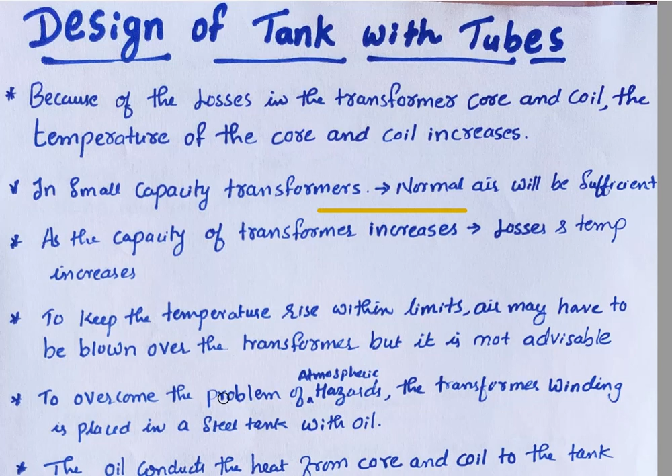For any transformer, the temperature depends on the losses - more losses mean more temperature. For small capacity transformers, normal air cooling is sufficient. As transformer capacity increases, losses and temperature increase, so air may have to be blown over the transformer. But this is not advisable because the air contains moisture and dust particles which affect the transformer winding.

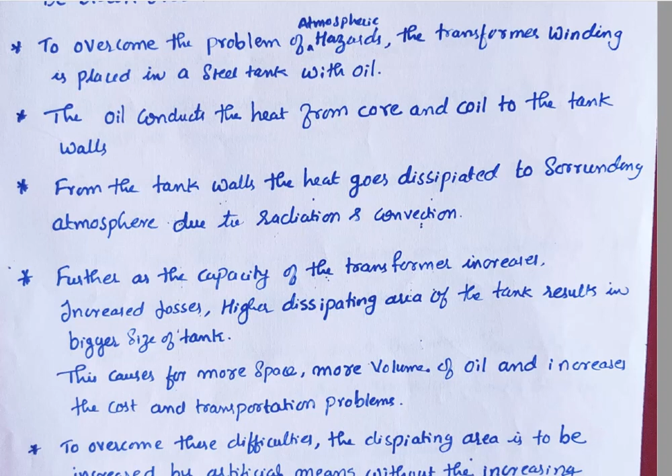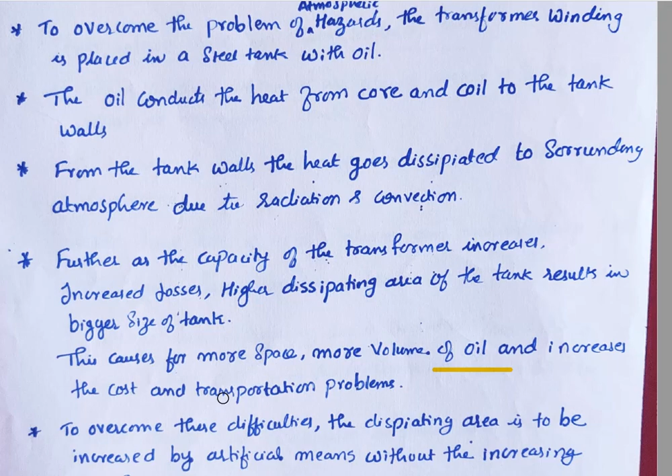As the capacity of the transformer increases, a high dissipating area of the tank is required. This means a bigger tank size is needed, which causes more space and volume, increasing cost and transportation problems. To overcome this difficulty without increasing the tank size, we can provide sufficient cooling through artificial means.

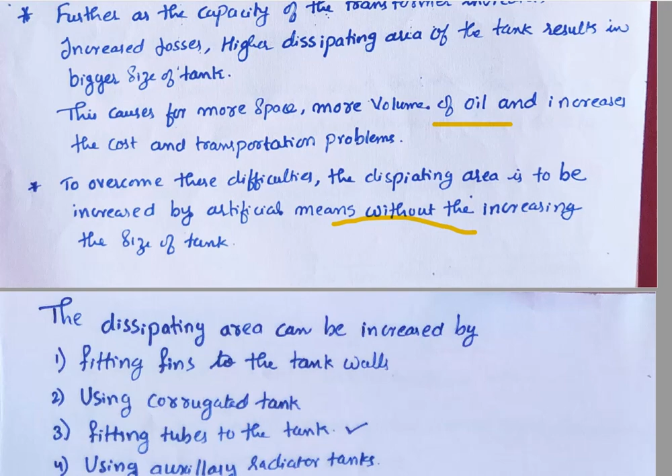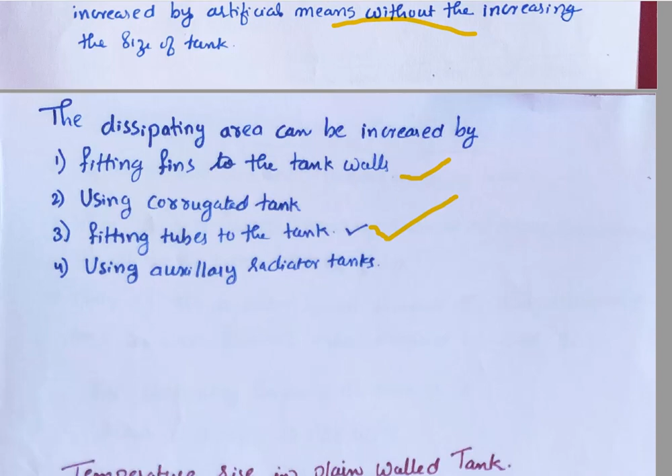The dissipating area can be increased by fitting fins to the walls. Other methods include using corrugated tanks, fitting tubes to the tank, and using auxiliary radiator tanks. We will basically use fitting tubes to the tank - this is the most economical and efficient method, which we have seen already.

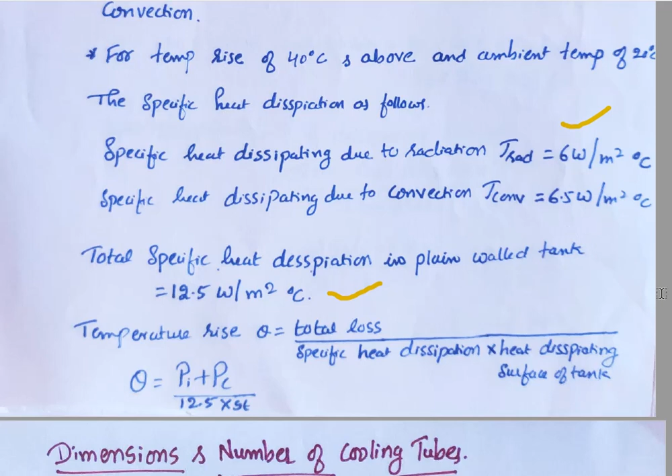Now, temperature rise in the plain tank: the specific heat dissipation in the plain wall tank is given as 12.5 watts per meter square, which includes radiation and convection. Radiation is 6 watts per meter square, and convection is 6.5 watts per meter square centigrade.

For dimensions of number of cooling tubes, we have derived the equation for the dissipating surface of the tank St, which will dissipate 12.5 St, where St is the surface area of the tank that I need to find.

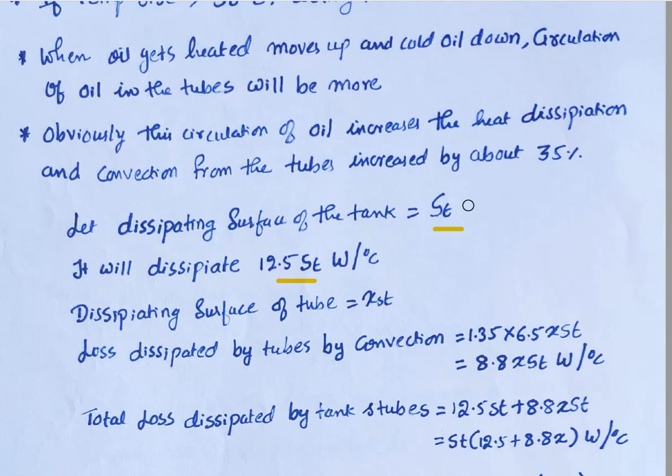The dissipating surface of the tube is x into St. The loss dissipated by tubes by convection is 1.35 times that - usually we take 35% more. So the total loss dissipated by the tank and tubes together gives the surface area of the tank as 12.5 plus 8.8x, as we saw yesterday.

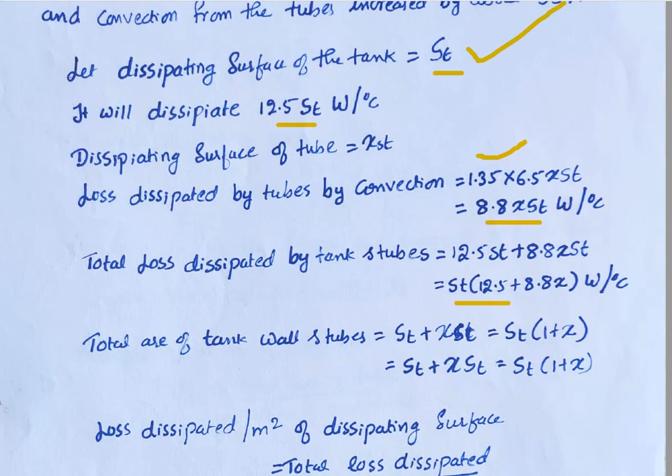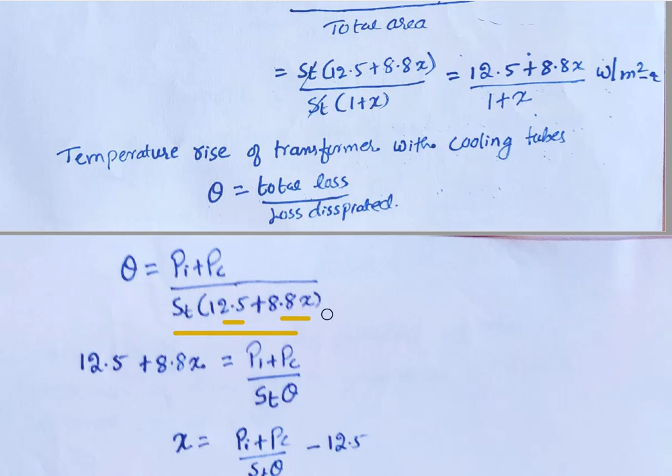Finally, theta, the temperature, equals the losses Pi plus Pc - these are iron losses and copper losses. The loss dissipated is given by the surface area of the tank into 12.5 plus 8.8x. Here 12.5 is due to convection and radiation, and 8.8x is due to the 35% more than the convection for tubes.

So finally you get the x value, and the total number of tubes required is the total area of the tubes divided by the area of each tube. The formula we derived is: number of tubes equals 1 by 8.8 of [(iron losses plus copper losses) by (theta times St)] minus 12.5, where theta is temperature and St is surface area of the tank.

Pi dt into lt, where dt is the diameter of the tube and lt is the length of the tube. This finally gives number of tubes equals 1 by 8.8 pi dt lt times [(Pi plus Pc) by theta minus 12.5 St].

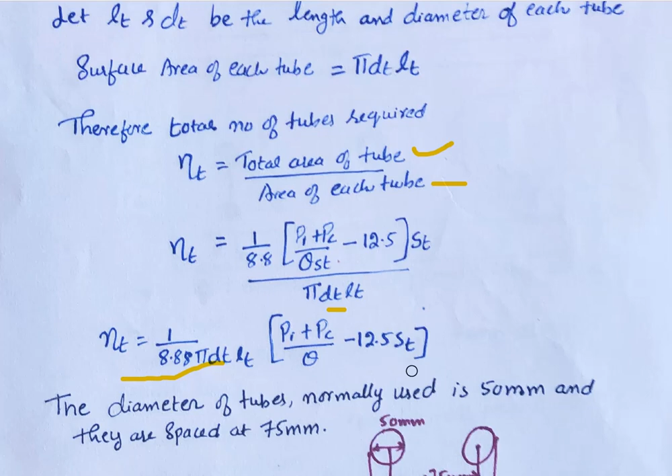Now usually the diameter of the tube normally used is 50 millimeters, and they are spaced at 75 millimeters center to center distance, with the total being 125 mm. Usually we consider only the center to center distance.

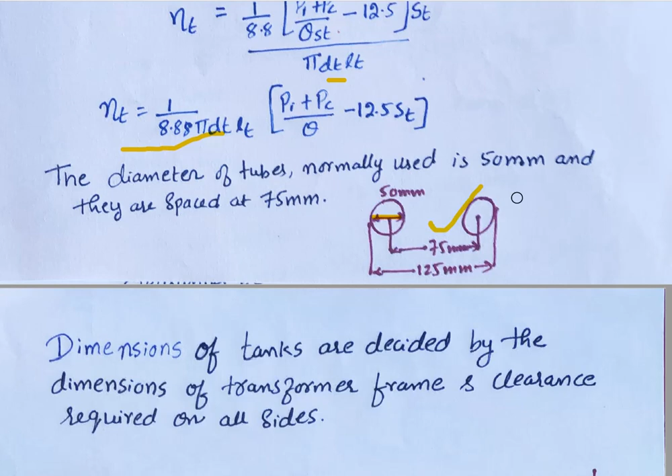The dimensions of the tank are decided by the dimensions of the transformer frame and clearance required on all sides. It also depends on kVA rating, voltage rating, power factor, and the losses. This is a three-phase core type transformer - this is the clearance between the winding and the frame, called C4, and this is the clearance between the ground and the winding of the transformer, shown here.

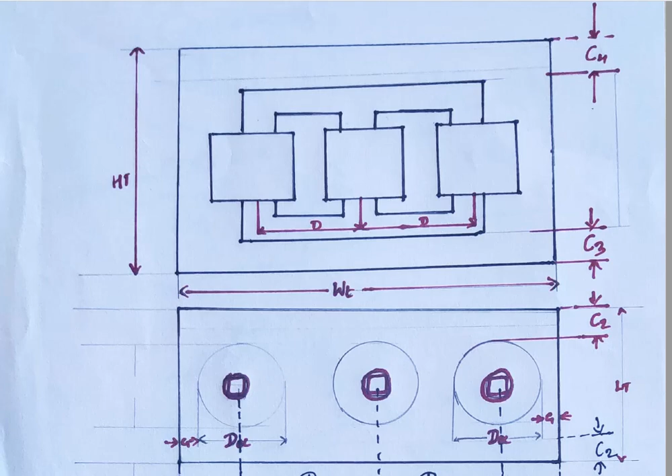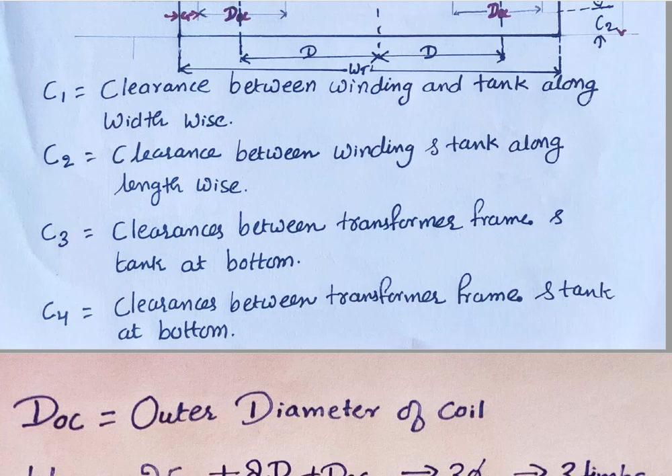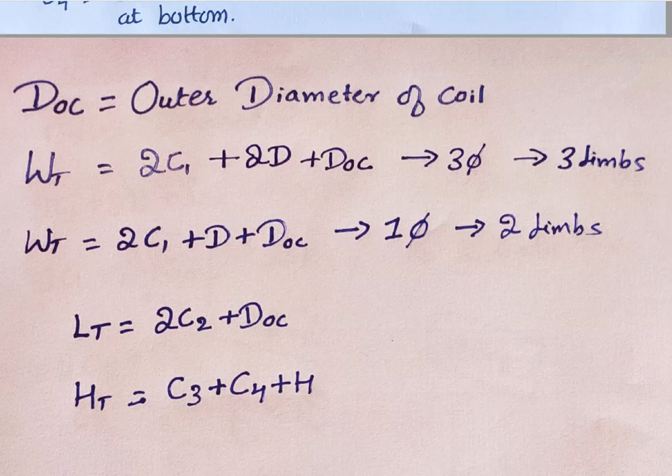This is the diameter, the distance between one limb and another of the transformer, and this is the diameter of the coil, as given and as we saw yesterday. Doc is the outer diameter of the coil. So WT equals 2C1 plus 2D plus Doc.

How you get WT: it is D plus D, that is 2D, and half of Doc plus half of Doc makes one Doc, plus C1 plus C1 which is 2C1. You get this for three phase, and for three phase there are 3 limbs while single phase has 2 limbs.

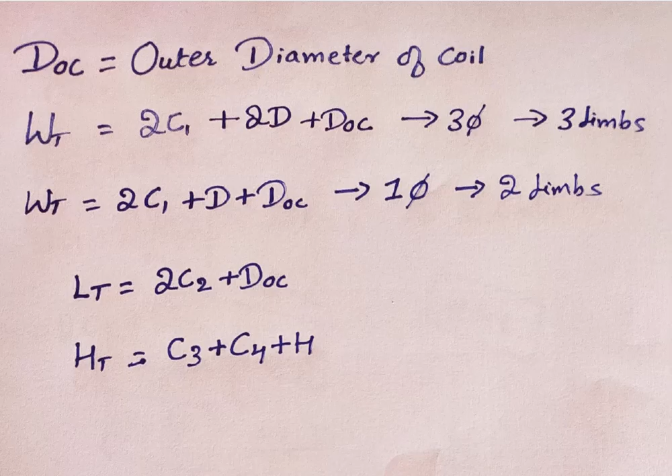For the length of the tubes - the length of the tank and height of the tank - these have been given by these formulas, so while solving the problems you can use this. Now let us solve some problems on this.

The first question: a tank of 1250 kVA natural oil cooled transformer has dimensions length, width, height of 0.65 meter into 1.55 meter into 1.85 meter respectively.

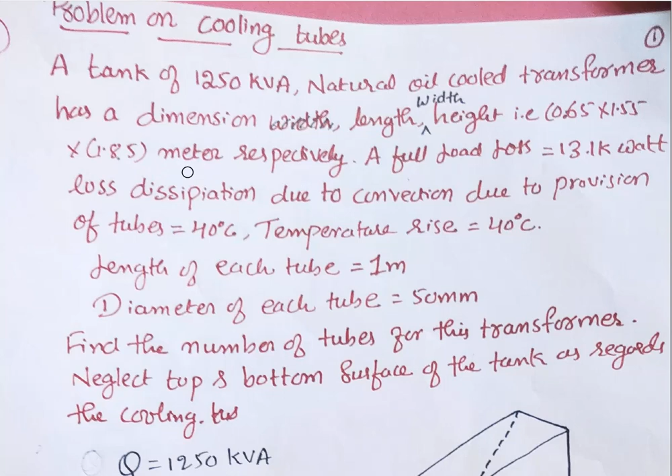Length, width and height have been given. Full load loss of 13.1 kilowatt has been given. Losses include Pi plus Pc, iron losses plus copper losses, and loss dissipation due to convection due to the provision of tubes. Temperature rise is 40 degrees Celsius, length of the tube is 1 meter, and diameter of each tube is 50 mm. If diameter of each tube is not given in the question, take 50 mm only.

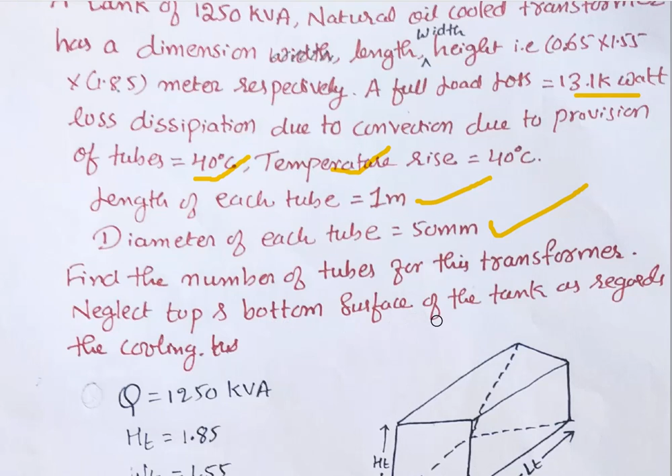So what we need to do is find the number of tubes for this transformer, neglecting the top and bottom surface of the tank as regards the cooling.

Let us say this is my transformer tank. So here, this portion, and the back of this, one more portion will be the same, and similarly this is one portion. This portion from here to here, yes, this portion includes this also. So opposite to this one, one more portion will be there.

So in the question, this is WT, width of the tank, and length of the tank and height of the tank have been given, and the power of the transformer is 1250 kVA. Let us estimate the surface area of the tank.

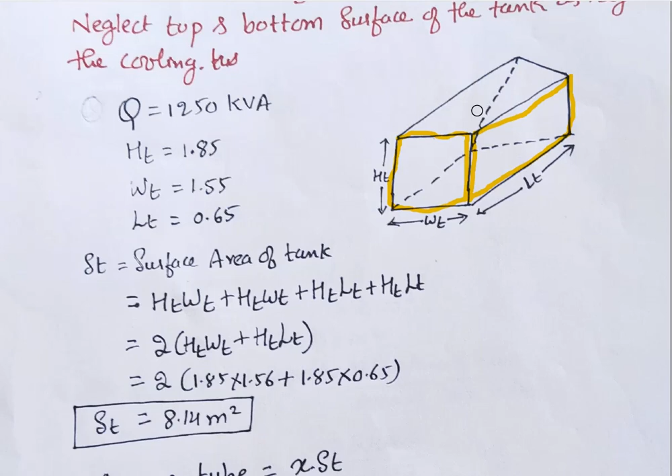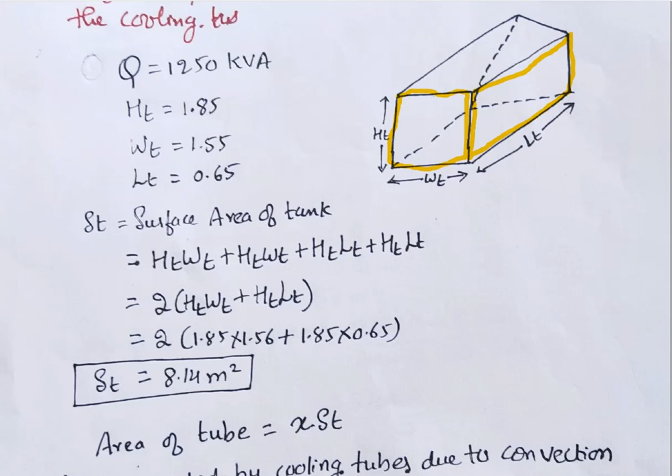What is the total surface area of the tank? So total surface area of the tank is this portion and the backside of that, and this portion and backside of that. Usually the top portion and bottom portion are neglected, so only the tubes will be arranged on the sides. So now for this portion my area will be...

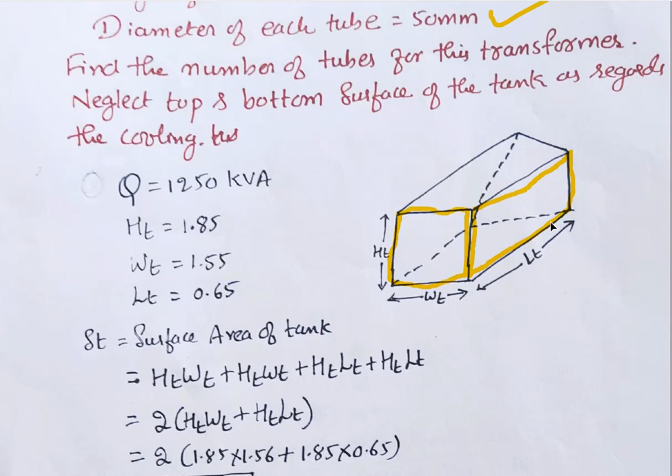This is like a rectangle. So HT into WT, and one more will be the backside, plus HT WT. This portion will again be rectangular, HT height of the tank into LT, and the same thing on the opposite side will also be there. So 2 times HT WT plus 2 times HT LT, given here as 2(HTWT) plus 2(HTLT). So 2 into 1.85 into 1.56, this is given in the question.

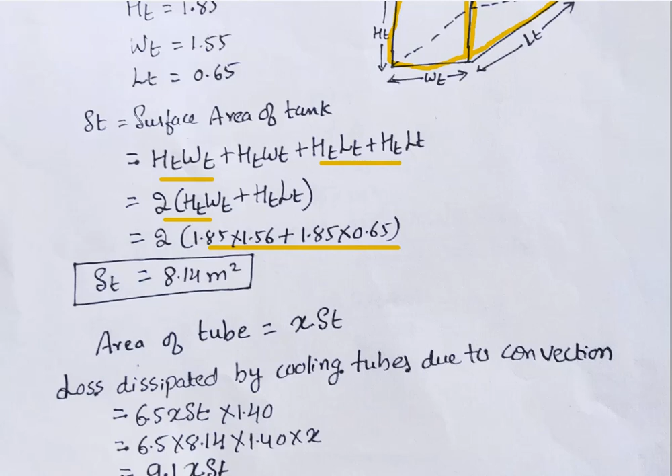So these values are these values, as per the question. Then from this we find out the surface area of the tank. It is 8.14 meter square.

Next, we need to find the area of the tube. Area of the tube is x into St, where we know St but need to find x. So how to find x?

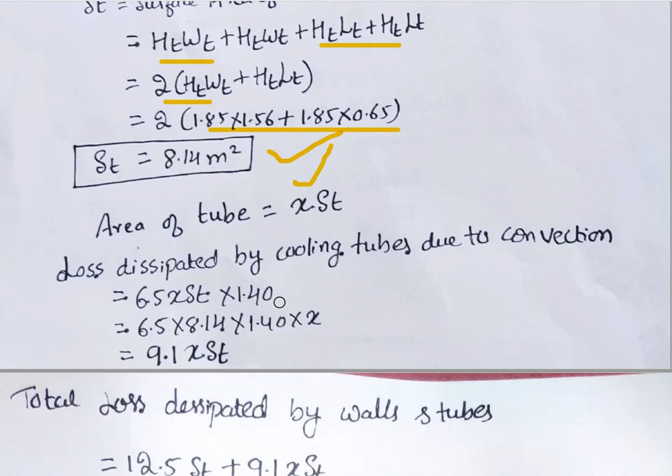Loss dissipated by the cooling tubes due to convection is 6.5 into x into St into 1.40. They have given 40% instead of 35. In the derivation we have seen 35%, but here in the question they have given 40%. So 6.5 into my surface area of the tank, 8.14, into 1.4 into x.

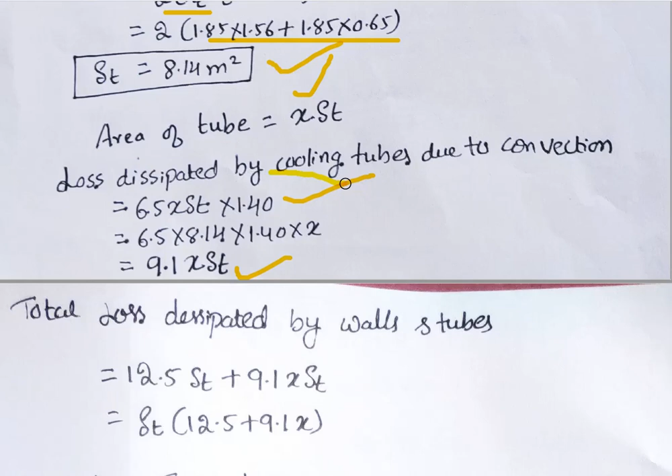So it becomes 9.1 x into St. Keep this St in this form only. Now this is the loss dissipated by the cooling tubes due to convection. Now this is the loss dissipated by the walls and tubes.

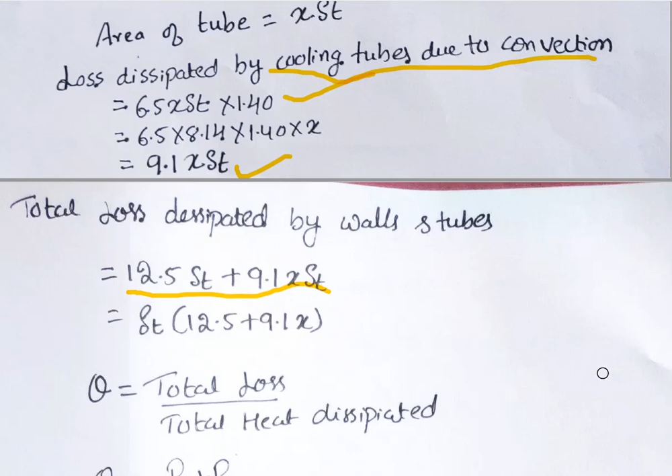So it is 12.5 St plus 9.1 x St. By the walls and combination of tubes, this 12.5 is due to radiation and convection, and here 9.1 is due to convection into St, the surface area of the tank. So if you take St common, we get St into (12.5 plus 9.1x).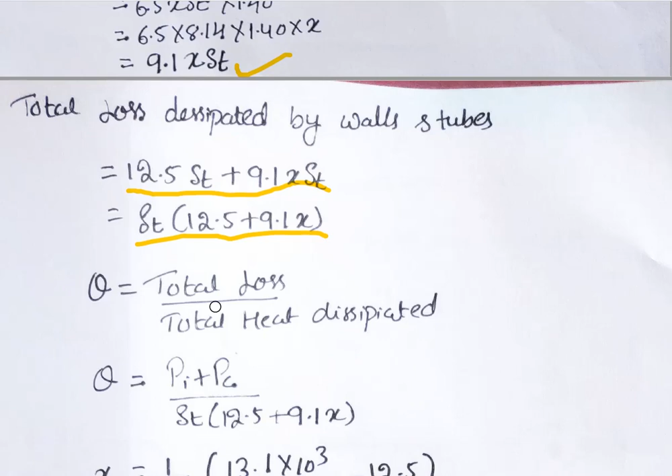So temperature equals total loss by total heat dissipated. So theta equals Pi plus Pc, that is iron losses plus copper losses, giving the total losses, divided by St, the total heat dissipated.

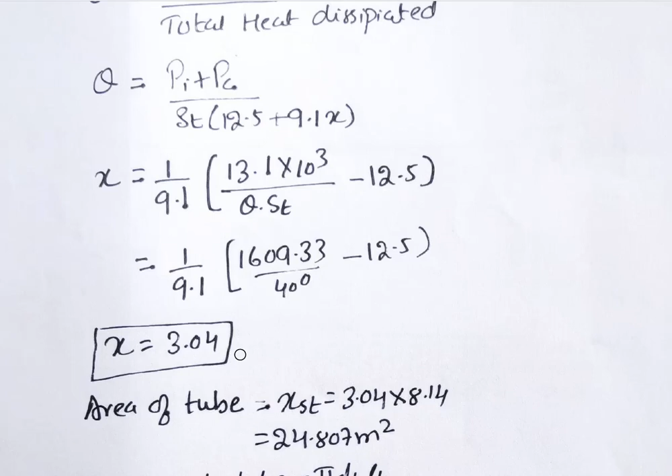So you can find x equals, after applying all the values, finally x equals 1 by 9.1 into (1609.33 by 40 degrees Celsius), since theta is 40 degrees, minus 12.5, as given in the question. So finally you get x equals 3.04.

Now you can find the area of the tube. Area of the tube is 3.04 into surface area of the tank. If you multiply, you get 24.807 meter square. Then the area of each tube can be found with the formula pi into dt into LT.

So pi, dt is given, LT is given as 1 meter, and dt, diameter of the tube, is given as 50 mm. So convert it into meters, it becomes 10 raised to minus 3. So finally you get 0.157 meter square.

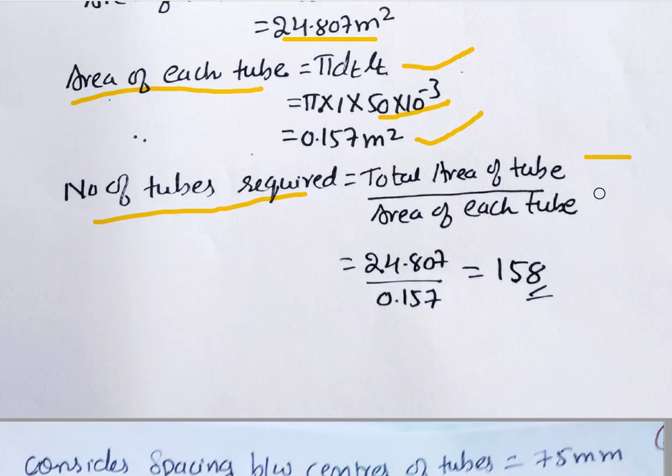So the number of tubes required is given by the formula: total area of the tubes divided by area of each tube. Total area of the tube is 24.807, and area of each tube is 0.157, so we finally get 158.

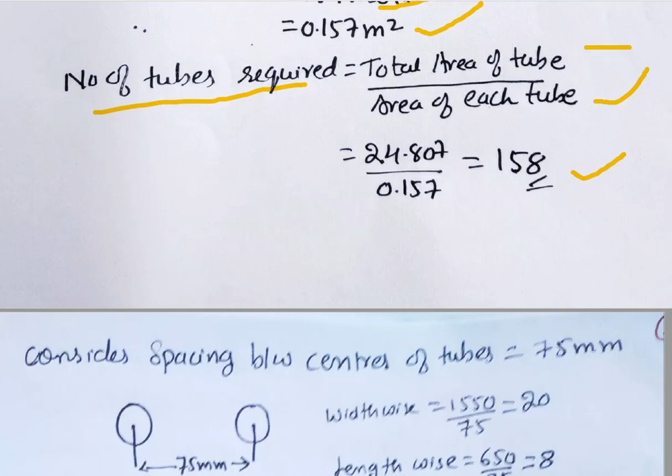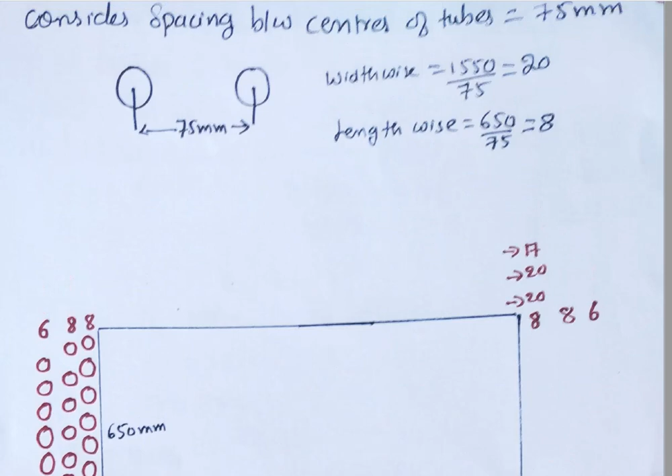Now the question arises, how to fit these 158 tubes in the transformer tank. How many tubes should be in this portion and how many in this portion, that we need to determine. Usually, as we know from the derivation, the tube spacing between center to center is 75 mm.

So here, widthwise it is 1.55 meter. If you convert it into millimeter, so it is 1550, and the length is 650 mm.

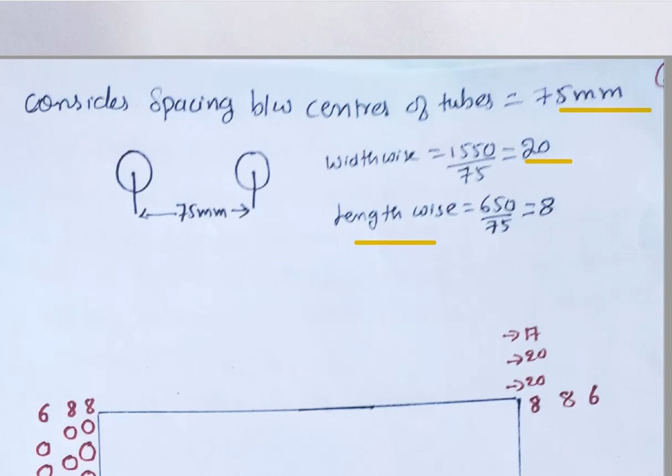So we need to place here and here. Now width wise, 1550 by 75, you will get 20. So 20 tubes can be accommodated in a single layer. Lengthwise it is 650 divided by 75, gets 8. Now if you place, total number of tubes is 158.

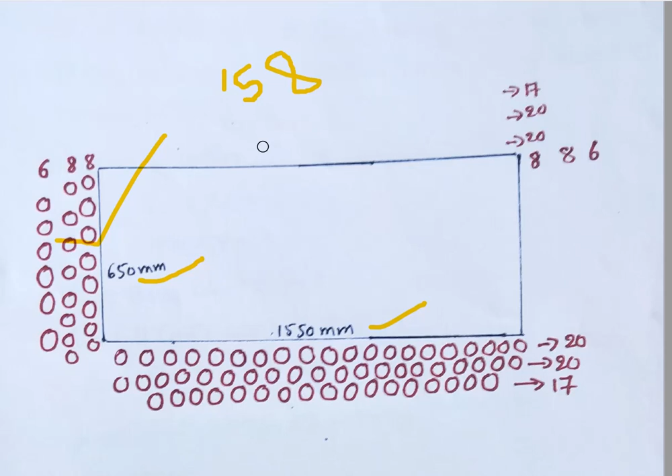Total number of tubes is 158. So I need to place these 158 tubes in this portion, and in this, and in this, and in this. So equally it should be arranged.

So comes to this point. 1550 mm divided by 75, you will get 20. So for one layer, 20 tubes I have placed here, and next layer exactly I cannot place here. In between the gap I need to place here. So here 20. Again above that again one should be placed.

You should leave some space here. Again 17 I placed here. There is no hard and fast rule, you need to place 17 only. Below 20 you can place in such a way that it should not accommodate more than 20 tubes.

So here 20, 20, 40, 57, and here also 57. So 57 plus 57 is 114, and here I placed 8 tubes. So 8 plus 8 is 16, 16 plus 6 is 22, 22 plus 22 is 44, 44 plus 114 you will get 158 tubes. So here I have placed 8, here I have placed 8.

In above this I cannot place 8. Again as you go on increasing layer by layer, your tubes should be reduced. So here I place 6. No problem here if you place 8, 8, 7, and here you can place 18 also.

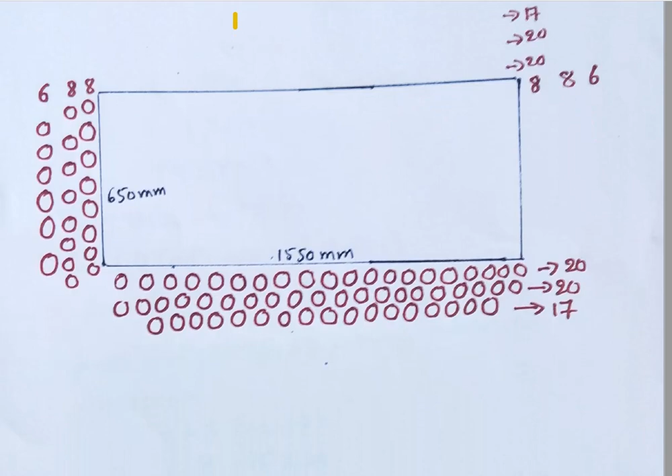Then coming to the second problem: a 250 kVA, 6600 volt by 400 volt 3-phase core type transformer has a total loss of 4800 watts on full load. The transformer tank is 1.25 in height and 1.5 into 0.5 in plan. Design a suitable scheme for cooling tube if average temperature rise is limited to 35 degrees Celsius. Diameter of tube is 50 mm and spacing between the tube is 75 mm, and the average height of the tube is

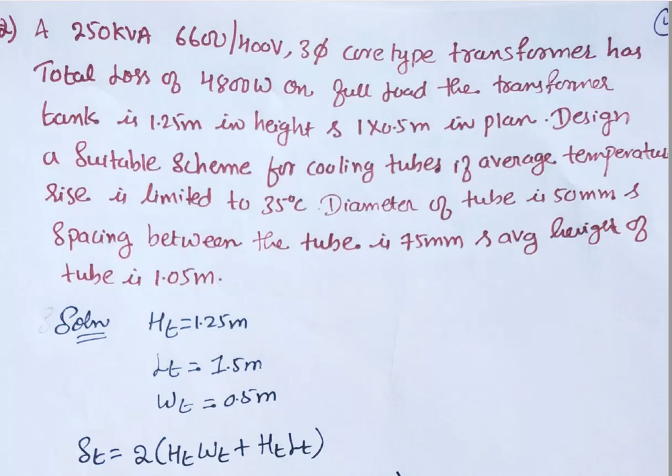1.05 meter. So here they had been given height of the tank, length of the tank, and width of the tank. Height of the tank is 1.25 meter, length of the tank is 1.5 meter, and width of the tank is 0.5 meter.

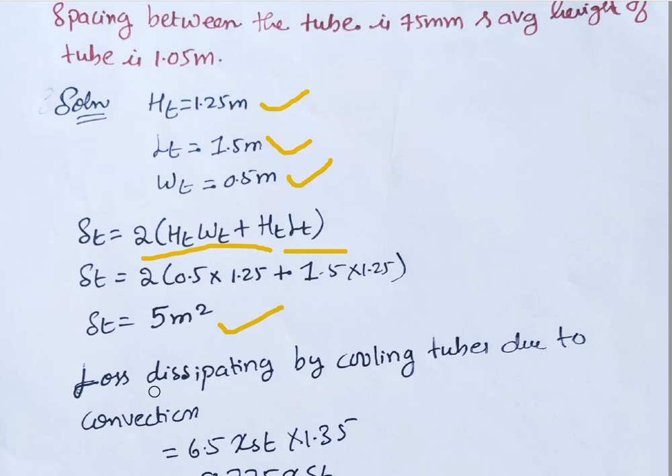Now surface area of the tank, similarly as how you solved the previous problem, it is 2 into ht into wt plus ht into lt. Here also they have not considered the top and bottom portion. So after applying all values of ht, lt, wt, you will get surface area of the tank as 5 meter square, and loss dissipated by cooling tubes due to convection is 6.5 into x into st.

It is x into surface area of the tank into 1.35. This is due to the convection. So you will get 8.775. So the total loss dissipated by walls and tubes: 12.5 st plus 8.77.

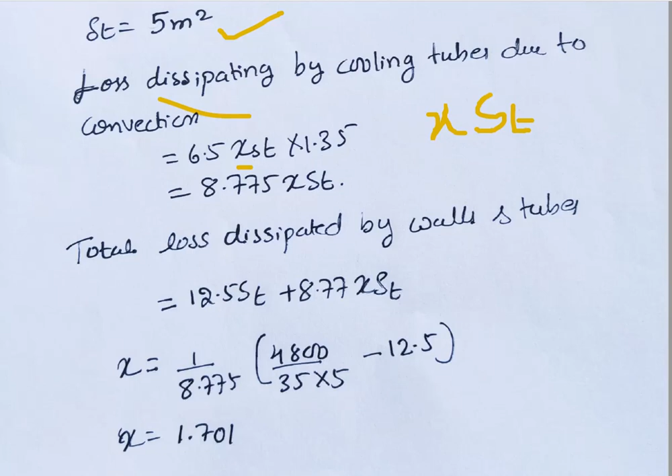Again you need to take st as common, then you can solve. So finally you will get x equals to 1.701. So area of tube will be given x into st as per the formula. So you will get area of the tube, it is 8.54 meter square.

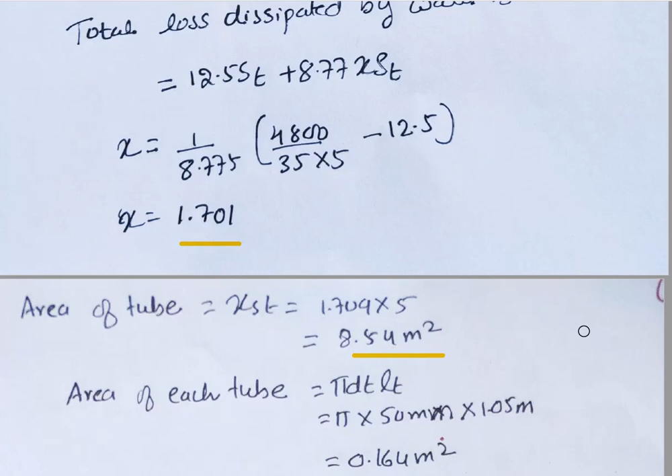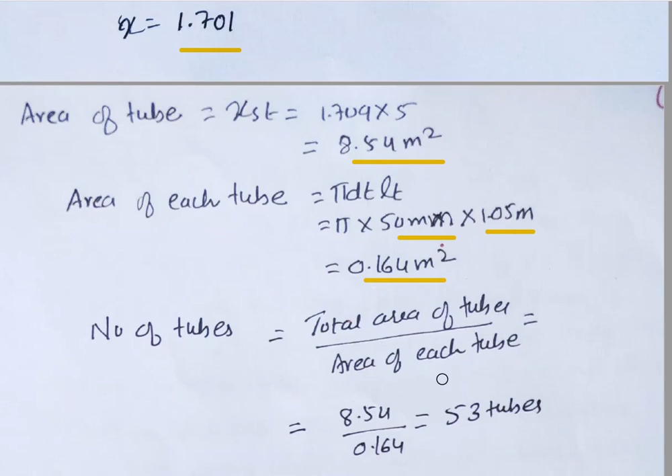Then the area of each tube, it is pi into dt into lt. Dt, diameter of the tube, is 50 mm, and height of the tube, that is length of the tube, had been given as 1.05 meter. So finally you will get area of each tube, it is 0.164 meter square, and the number of tubes required is total area of the tubes divided by area of each tube.

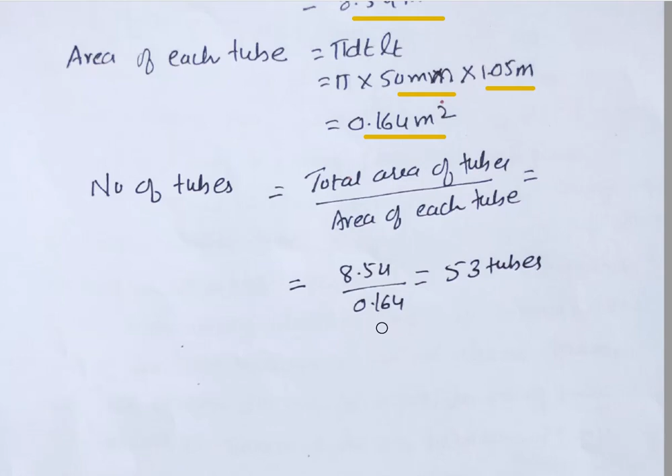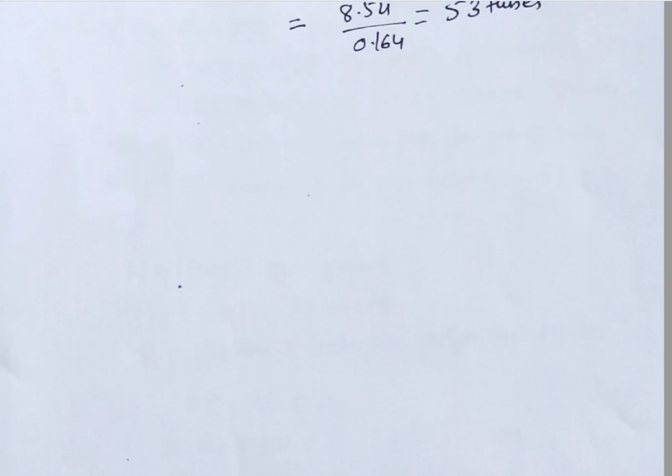So 8.54 by 0.164 gives 53 tubes. So these 53 tubes you can accommodate lengthwise and widthwise as we solved in the previous problem. So this you can arrange like this.

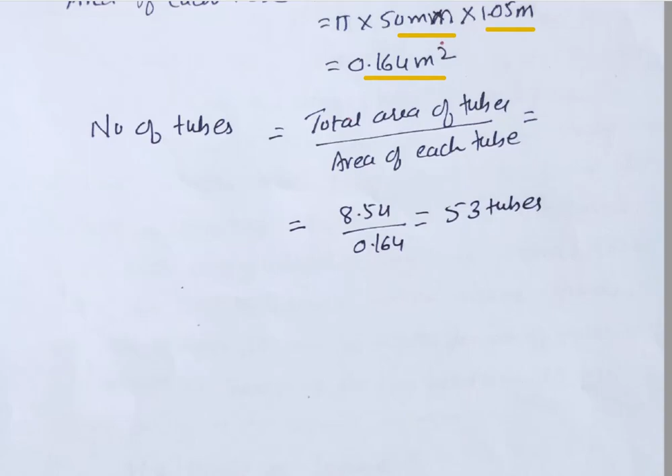So the third problem is a 1000 kVA, 6600 volt, 440 volt, 50 hertz, 3 phase delta star connected core type transformer having a distance between the adjacent limbs of 0.475 meters. Outer diameter of HV is 0.44 meter. Height of the frame is 1.24 meter. Core loss is 3.7 kilowatt. Copper loss is 10.5 kilowatt. Improvement due to convection is 35%. Temperature should not cross 35 degrees Celsius.

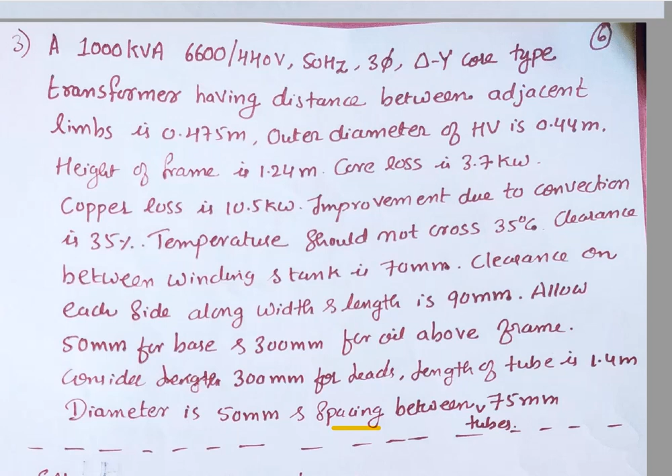Clearance between the winding and tank is 70 mm. Clearance on each side along width and length is 90 mm. Allow 50 millimeter for base and 300 millimeter for oil above frame. Consider 300 mm for leads and length of tube is 1.4 meter. Diameter is 50 mm and spacing between the tubes is 75 mm. We will see this larger problem.

So let h be the height of my frame, DOC means outer diameter of the coil, and D equals distance between the adjacent limbs. Now what is height of the frame, outer diameter and distance between the adjacent limbs? We will see.

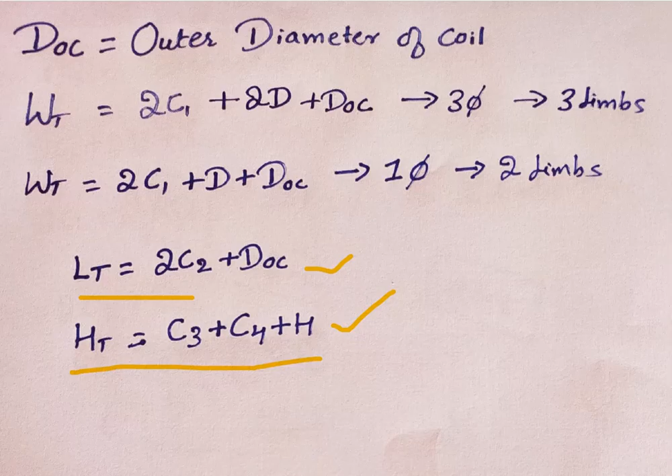Now this is my distance between the adjacent limbs, capital D here. D is distance between the adjacent limbs. I will show you clearly. So distance between the adjacent limbs D, and this is the clearance from the bottom to my coil, that is C2, and this is the clearance between my coil and the tank, that is C1. C3 is the distance between the coil and the transformer frame, that is the above portion.

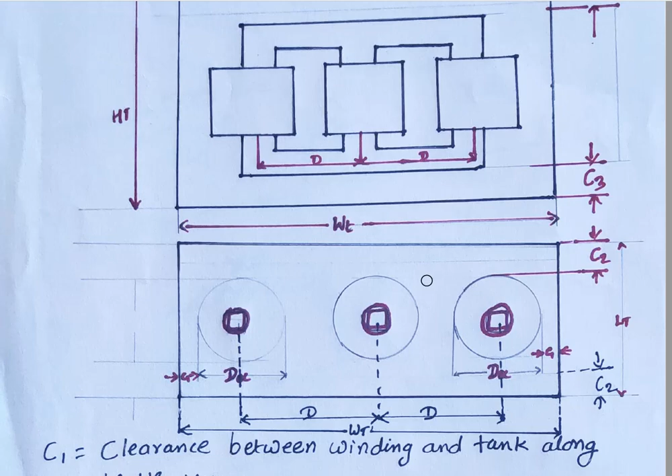So the total height of the tank will be this, and the length of the tank will be this portion. This we have given here. Length of the tank has been given this portion. Now we will see how to find it.

Yes, now WT equals width of the tank. So this is my width of the tank. So from here to here it is width of the tank, D plus D, it is 2D, plus half of DOC plus half of DOC, it is 1 DOC, and here C1 and here C1, so it is 2C1. So the total width of the tank becomes 2D plus DOC plus 2C1. The same had been given here, so 2D plus 2C1 plus DOC.

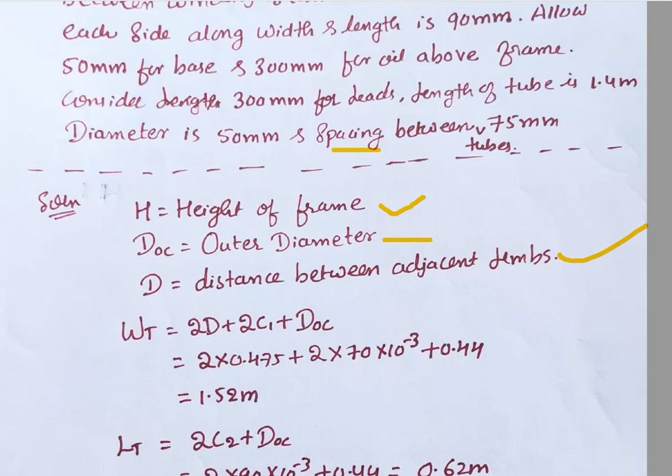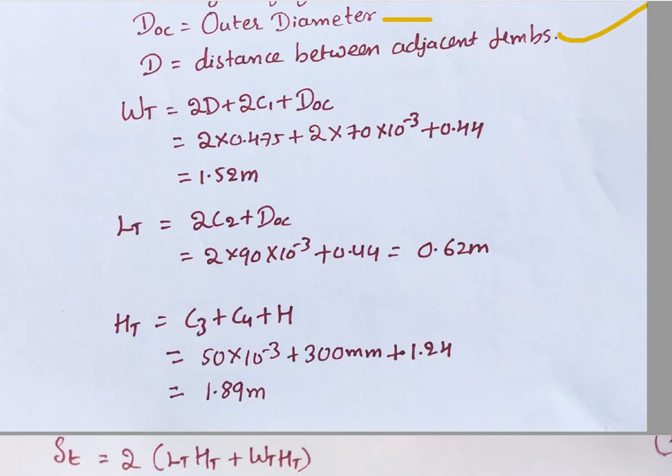So in the question, the distance between the adjacent limbs had been given as 0.475 meter. The same thing, 0.475 meter, plus clearance between the winding and the tank given as 70 millimeter, and the diameter of the coil has been given as 0.44. So you will get 1.5.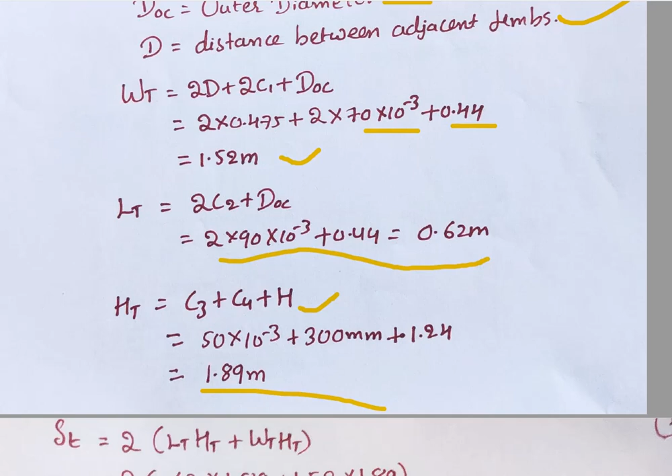So from this find out the surface area of the tank. Surface area of the tank is 2 into LT into HT plus WT into HT. So you will get 8.08 meters. So loss dissipating is 6.5 x into ST into 1.35.

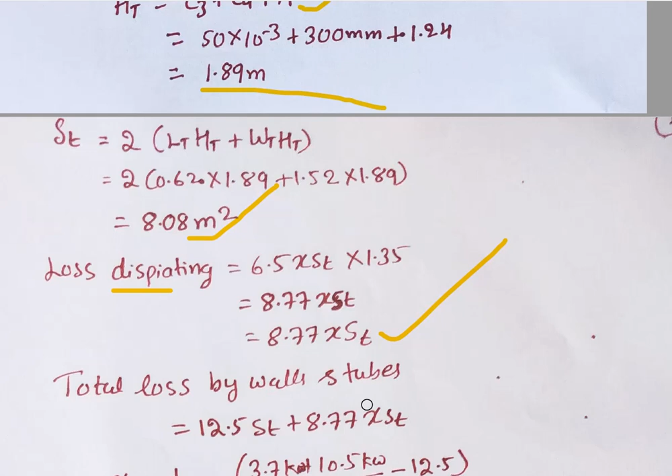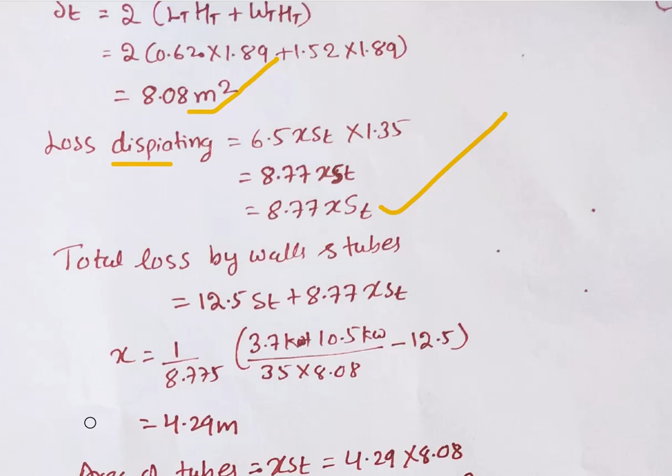Here we have taken 35% when compared with the tanks and walls. So total loss by wall and tubes, it is 12.5x, 12.5 ST plus 8.77x ST. So finally you will get x equals to 4.29 meter. So area of the tubes is x into ST. So area of the tube you will get is 4.29 into 8.08, x into ST, which is 34.72 meters.

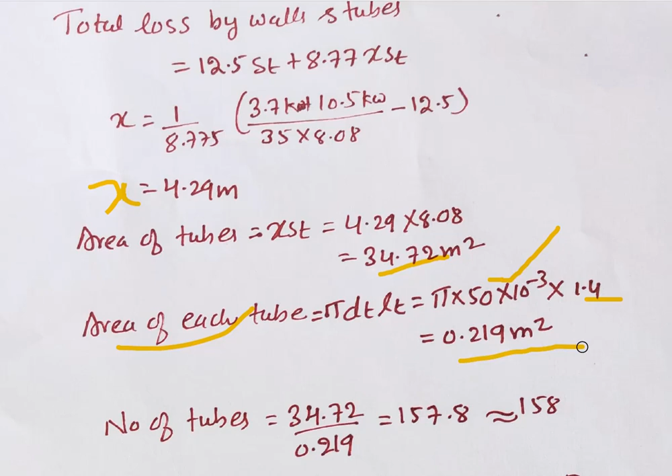So area of each tube is pi into dt into lt. Length of the tube has been given as 1.4 meter and the diameter of the tube 50 into 10 raised to minus 3, so it has been given 0.219 meter square area of each tube. So number of tubes is total area of the tube, 34.72, divided by area of each tube, 0.219, so you'll get 157.8.

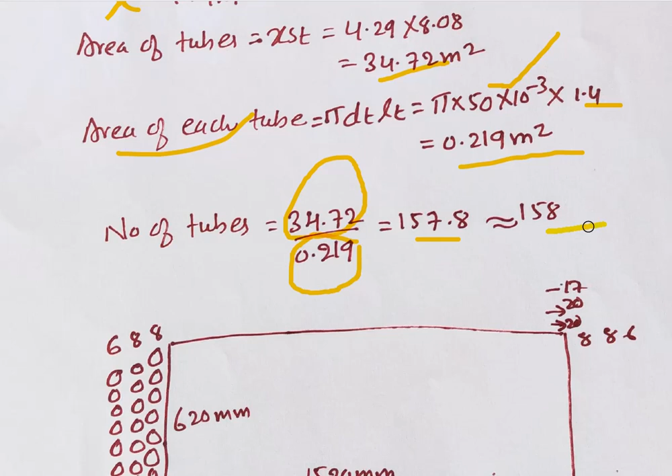If you make it a round figure it is 158. So as we did in the same way in the first problem, here 1520 millimeters and here 620 millimeters. Similarly 20, 20 and 17, we will accommodate in one side of the portion, it will be 20, 20 and 17, and opposite to that the same 20, 20, 17. Usually however the layers increase the tubes will be reduced. Here also 8, 8, and then the opposite part also you will have 8, 8, 6. So totally 114 plus 44, it is 158 tubes will be accommodated.